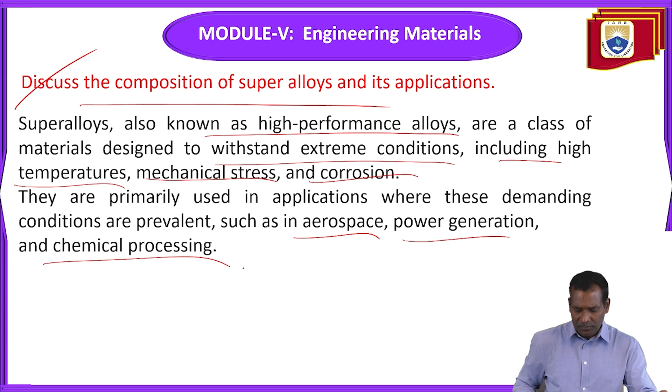It gives high performance and a better lifespan of a product. They are primarily used in applications where these demanding conditions are prevalent, such as aerospace, power generation, and chemical processing. The composition of super alloys is divided into three: nickel-based, cobalt-based, and iron-based. These are the main categories based on their primary alloying element. So what is the primary alloying element in nickel-based, cobalt-based and iron-based?

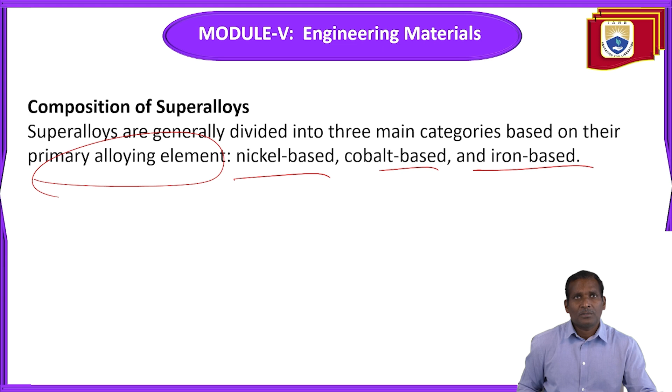So we will discuss nickel-based super alloys. The primary element is nickel, providing high temperature strength and resistance to oxidation and corrosion. Next one is chromium, which enhances oxidation and corrosion resistance. Cobalt adds strength and stability at high temperatures. So to enhance the properties, the primary element is combined with other metals like chromium and cobalt to get the desired properties.

Next, molybdenum and tungsten increase high temperature strength. Aluminum and titanium form gamma prime, which provides excellent high temperature strength. Next, niobium, tantalum and rhenium further enhance high temperature capabilities and mechanical strength. These are the nickel-based super alloying elements.

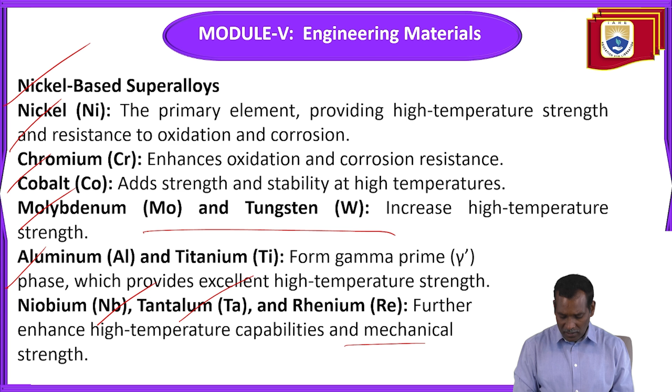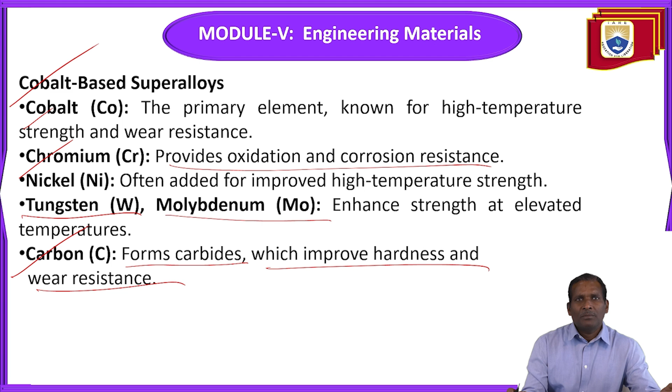Next, cobalt-based super alloys. The primary element is cobalt, known for high temperature strength and wear resistance. Chromium provides oxidation and corrosion resistance. Nickel is often added for improved high temperature strength. Tungsten and molybdenum enhance strength at elevated temperatures. Carbon forms carbides, which improve hardness and wear resistance. So cobalt is the main element, and chromium, tungsten, molybdenum and carbon are the secondary elements.

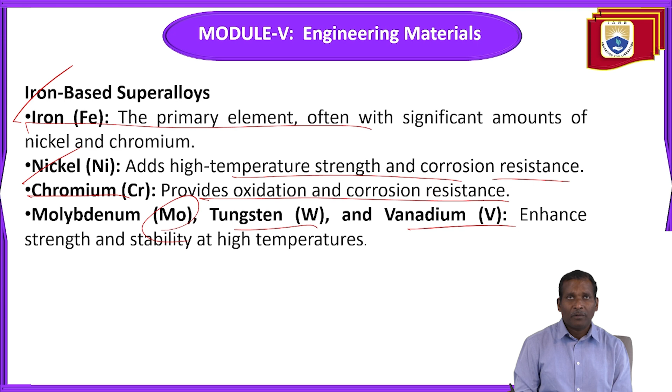Next, iron-based super alloys. Iron is the primary element, alloyed with significant amounts of nickel and chromium. Nickel adds high temperature strength and corrosion resistance. Chromium provides oxidation and corrosion resistance. Molybdenum, tungsten and vanadium enhance strength and stability at high temperatures. So by adding these elements, the alloy can withstand high temperatures, high mechanical stress, and corrosion. That's why these alloys are called high performance alloys or super alloys.

Next, applications of super alloys. One is aerospace: used in jet engines, turbine blades, and discs, where components must endure high temperatures and mechanical stresses. That's why super alloys are used in the aerospace sector. The combustion chamber requires materials that can withstand extreme heat and pressure. Exhaust systems must resist oxidation and thermal fatigue.

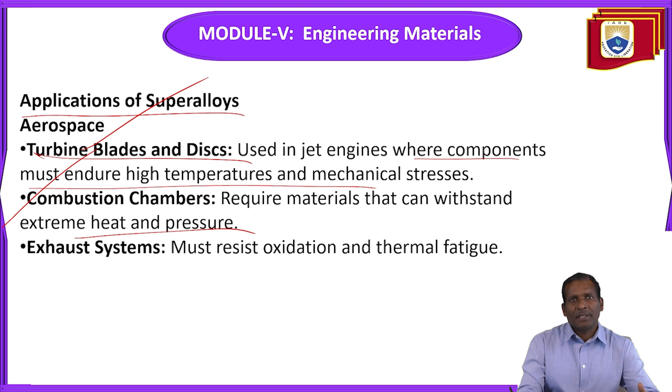Power generation: gas turbines, similar to aerospace applications, operate at high temperatures and pressures. In steam turbines, components such as blades and vanes must withstand high thermal and mechanical loads. Similarly, in nuclear reactors, structural components and fuel cladding require materials that can resist radiation damage and corrosion.

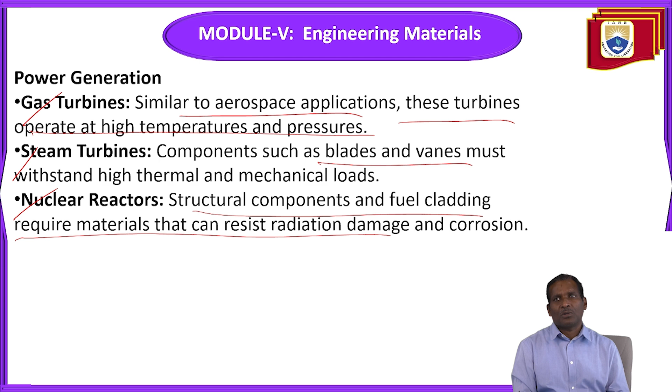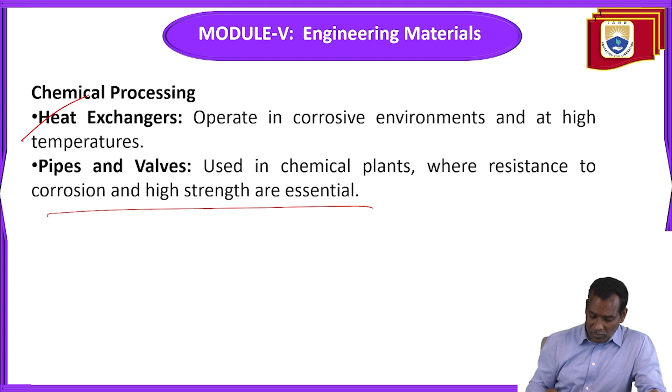Next, chemical processing: heat exchangers, pipes and valves. Heat exchangers operate in corrosive environments and at high temperatures. Pipes and valves are used in chemical plants where resistance to corrosion and high strength are essential. So wherever more corrosion resistance and high strength are required, super alloys are very useful in chemical processing.

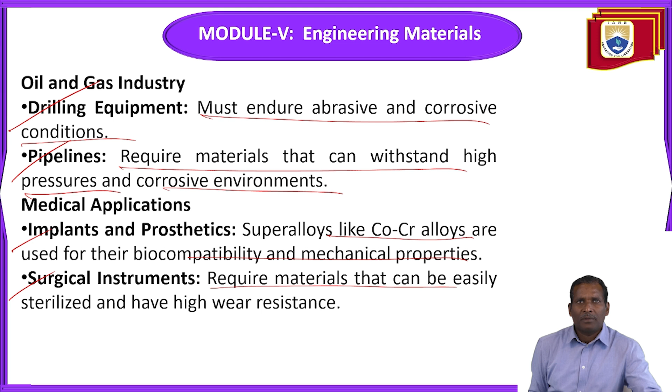Surgical instruments require materials that can be easily sterilized and have high wear resistance. That's why they are used in surgical instruments, and in implants and prosthetics wherever bone replacement and dental implantation are required. In the automotive industry, turbocharger components operate at high temperatures and require materials with excellent thermal fatigue resistance.

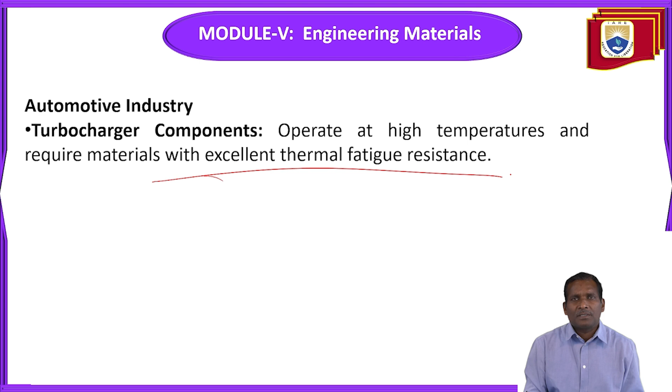Next question: explain the term ceramic and its composition and list out its various applications. First, we need to explain the term ceramics and its composition, and list the various applications. Ceramics are commonly non-metallic, inorganic solids that are typically made from clays and other natural materials through a process of heating and subsequent cooling.

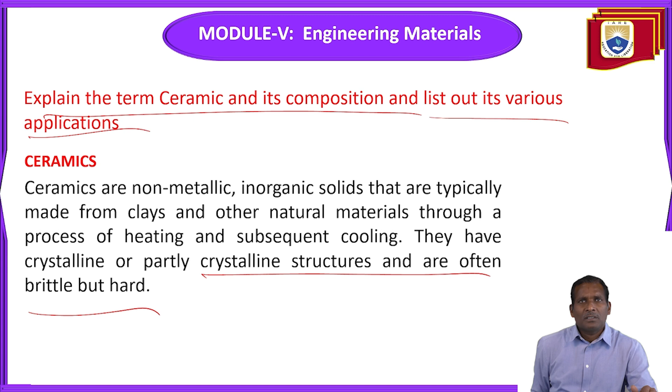So this is not metallic, so non-metallic. They have crystalline or partly crystalline structures and are often brittle but hard. It is brittle in nature but it is hard. The term ceramics, the definition we already have. So what do you mean, what is the ceramics material? I explained. Next, these properties and composition we will discuss.

The properties of ceramics are high hardness and strength, high melting points, good thermal and electrical insulation. It gives high hardness and strength. So hardness and strength come under mechanical properties. The melting point is a thermal property, and ceramic materials have a high melting point. So that's why you can use them at elevated temperatures wherever required.

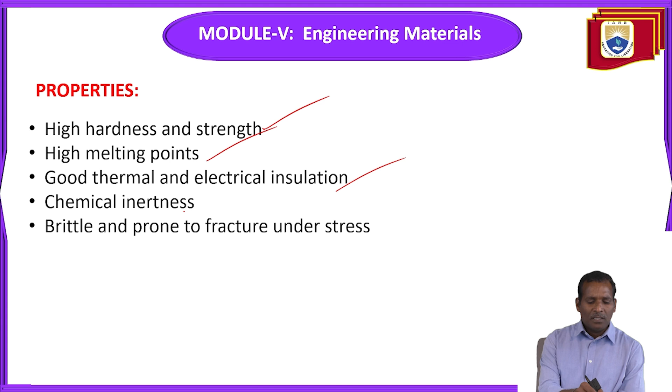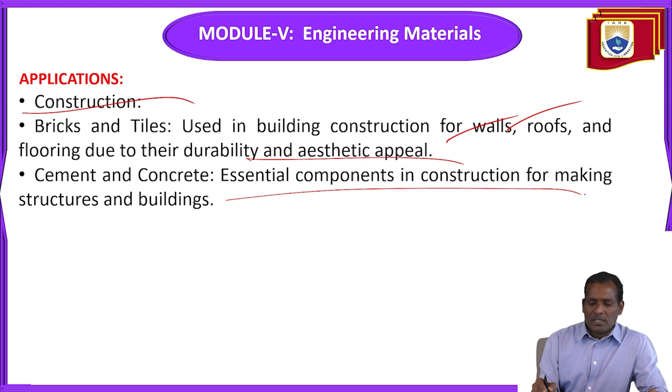Good thermal and electrical insulation also. Chemical inertness, and brittle and prone to fracture under stress. The applications: one is in construction. Bricks and tiles, used in building construction for walls, roofs, and flooring due to their durability and aesthetic appeal. So the appearance of ceramics is also good. Due to this, flooring, walls and roofs use this material, ceramics. Cement and concrete, essential components in construction for making structures and buildings.

Next, household appliances, so tableware and cookware. Tableware are plates, bowls, cups, and other kitchenware made from ceramics due to their hardness and ease of cleaning. Cookware items like baking dishes are made from heat-resistant ceramics. So what is the reason? Having this property, hardness, and also ease of cleaning. The heat resistance is very high, so that's why it is used for cookware items.

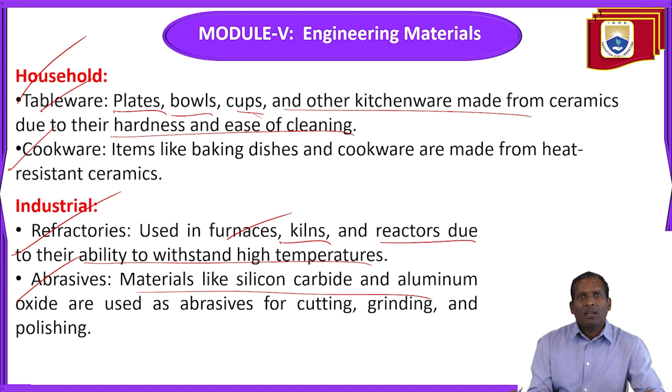In industry, refractories are used in furnaces, kilns, and reactors due to their ability to withstand high temperatures. Abrasives: materials like silicon carbide and aluminum oxide are used as abrasives for cutting, grinding, and polishing.

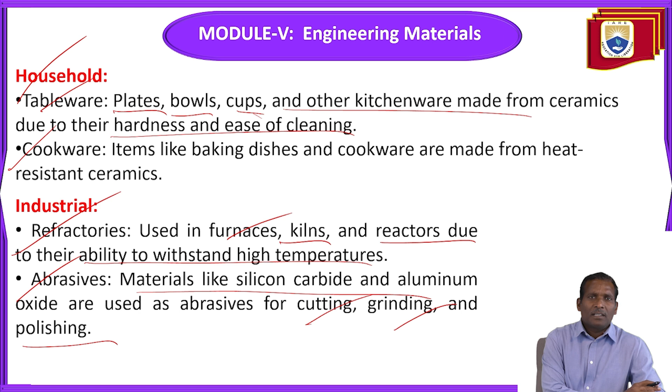In the medical field, dental implants and bone substitutes. Ceramics like zirconia are used for dental implants due to their biocompatibility and strength. Bone substitutes are used in orthopedic applications for bone repair and replacement. Electronics: capacitors and insulators. Ceramic capacitors are used in electronic circuits for their excellent electrical insulation properties. Insulators are used in electrical power lines and other electrical applications due to their high resistance to electricity.

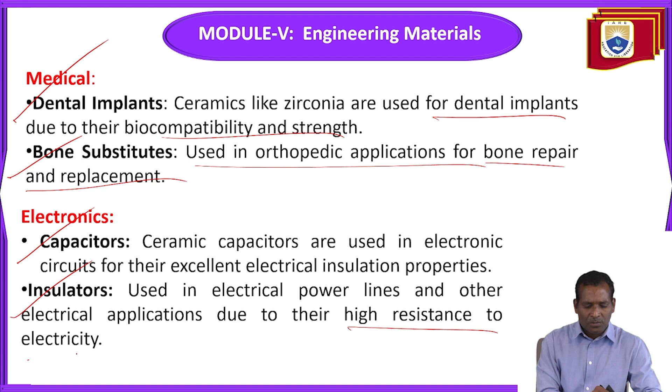Next, aerospace. Thermal barrier coatings: ceramics are used to coat engine components and protect them from high temperatures. Structural components: high-strength ceramics are used in various structural components of spacecraft and aircraft. Art and decoration: pottery and sculptures. Making decorative items, pottery and sculptures use these ceramics. So that's why ceramics are widely used in art and decoration.

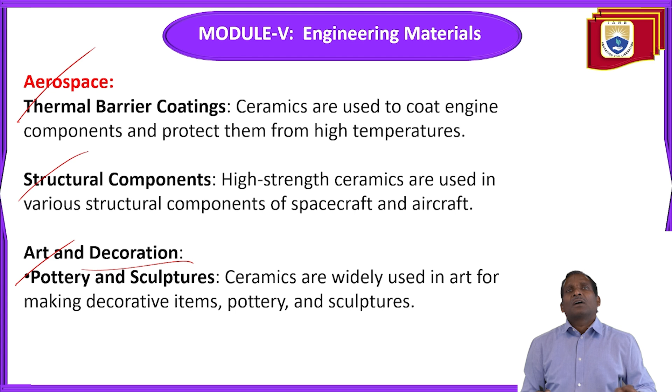So the next one is: explain the composition of polymers and list out the applications in detail. So what is a polymer? Polymers are large molecules composed of repeating structural units, monomers, connected by covalent chemical bonds. They can be natural, like cellulose and proteins, or synthetic, like polyethylene and nylon. Polymers exhibit a wide range of properties and can be engineered to meet specific needs.

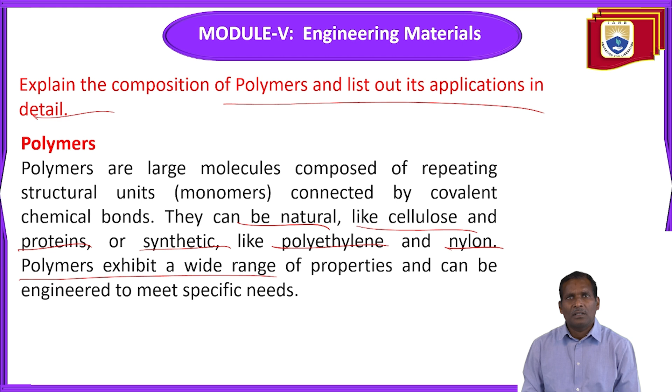Properties of polymers. What are the important properties? One is lightweight. Polymers generally have low density, making them lightweight. Corrosion resistance: they resist corrosion and degradation by chemicals, making them durable in various environments. Flexibility: many polymers are flexible, which allows them to be molded into different shapes and forms. Next, thermal and electrical insulation. Polymers often have low thermal and electrical conductivity, making them good insulators.

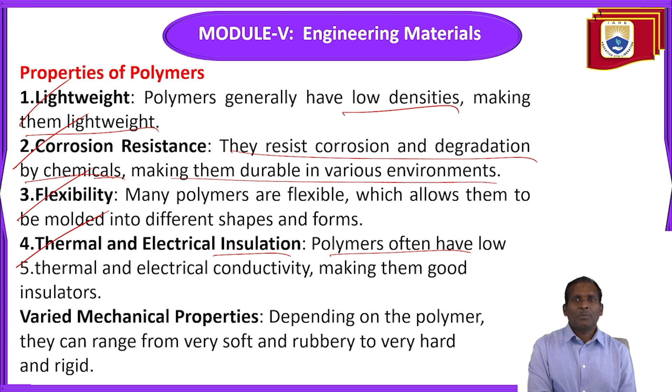Varied mechanical properties. Depending on the polymer, they can range from very soft and rubbery to very hard and rigid material. Next, applications of polymers: one is packaging. In packaging, plastic bags and wrappers are used for packing food, clothing, and other consumer goods. Bottles and containers are used for beverages, cleaning products, and other liquids due to their lightweight and durability.

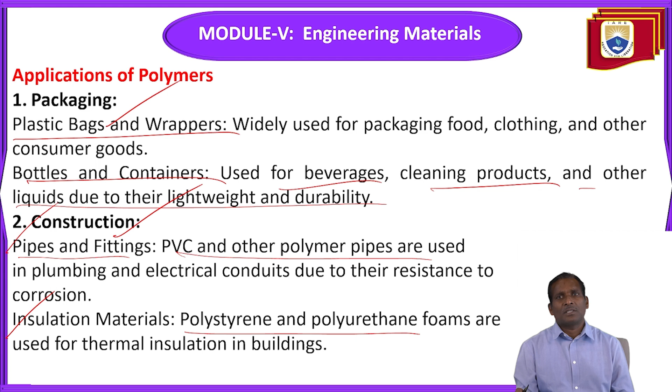Construction: pipes and fittings. PVC and other polymer pipes are used in plumbing and electrical conduits due to their resistance to corrosion. Insulation materials: polystyrene and polyurethane foams are used for thermal insulation in buildings. Next, electronics: insulating materials. Polymers like polyethylene and Teflon are used for insulating wires and cables. Flexible circuits are used in flexible electronic devices and wearable technology.

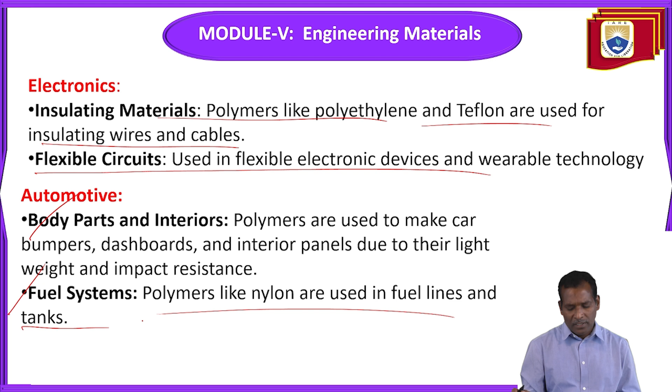In the automotive field, polymers are used to make body parts like car bumpers, and also for dashboards and interior panels due to their lightweight and impact resistance. Fuel systems: polymers like nylon are used in fuel lines and tanks. Consumer goods: toys, kitchenware, and furniture are made from polymers. Sporting goods: polymers are used in equipment like tennis rackets, helmets, and protective gear.

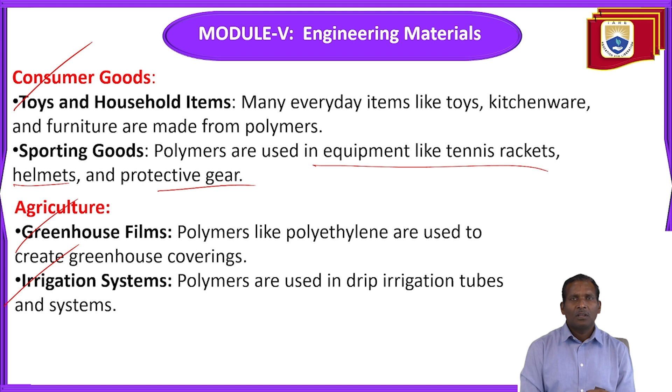Agriculture: greenhouse films and irrigation systems. Polymers like polyethylene are used to create greenhouse coverings. In irrigation systems, polymers are used in drip irrigation tubes. So why? Because these polymer materials are very durable. So these are the references taken for this question.